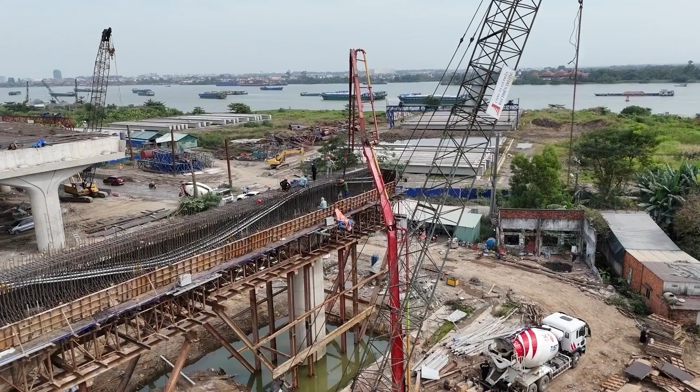Imagine cutting your project schedule by 17%. Imagine generating hundreds of optimized site plans in the time it takes to pour a cup of coffee. Or having an AI instantly identify every structural risk in a 200-page geotechnical report. This isn't science fiction. This is civil engineering in 2026.

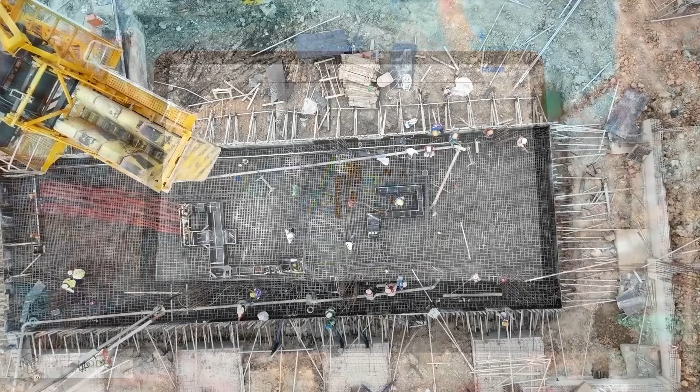Civil engineering is one of the oldest professions in the world. But the way we design, build, and manage infrastructure is changing forever. If you're still doing manual calculations, relying solely on traditional CAD workflows, or spending hours on documentation, you're already falling behind. Today, we're looking at the 4 AI tools that are redefining civil engineering. These aren't just cool gadgets, they are the new industry standard.

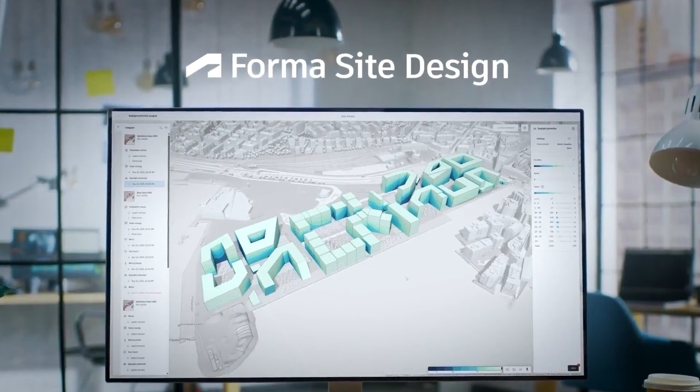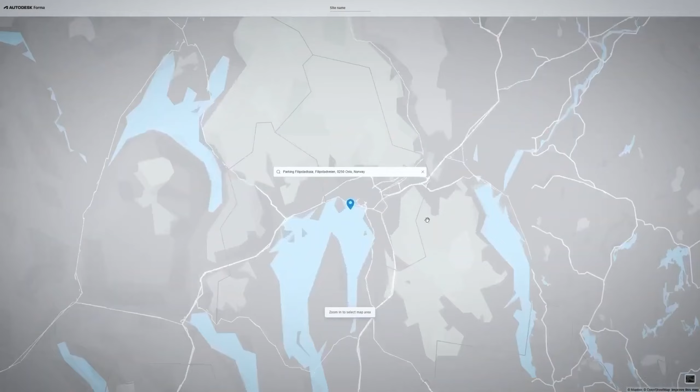Let's dive in. First on our list is Autodesk Forma. Formerly known as SpaceMaker, this AI-powered tool is an absolute game-changer for site planning and early-stage design. In the past, gathering site context and running initial feasibility studies could take weeks. Forma changes that by instantly pulling in real-world data to build a 3D context model of your site in minutes. But where it truly shines is its predictive analytics.

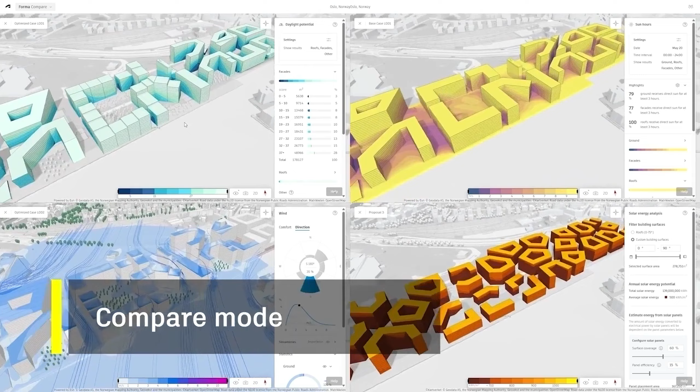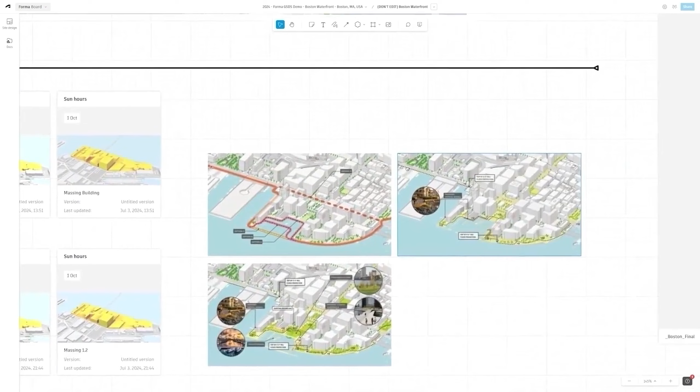Instead of waiting for specialized consultants, Forma uses AI to simulate wind patterns, sun exposure, daylight potential, and noise impact in real time. It allows engineers and architects to test hundreds of design iterations simultaneously. You can compare different massing options side by side, ensuring every project is optimized for sustainability, livability, and efficiency before the first stone is even laid. If you're in urban planning or large-scale development, this is your new best friend.

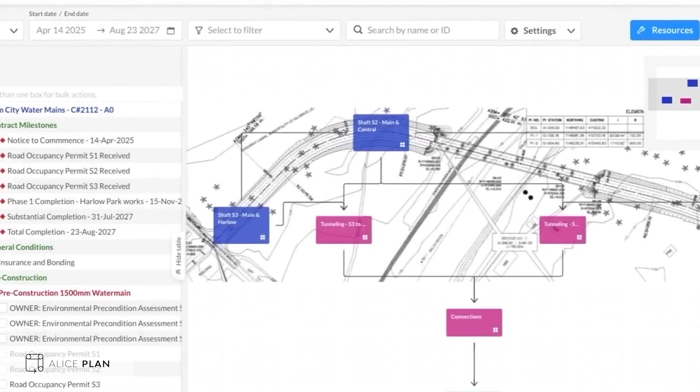Next up is Alice Technologies. We all know that construction scheduling is a nightmare. Traditional Gantt charts are static, and one delay can cost millions. Alice is the world's first generative construction platform. It uses AI to analyze your project's constraints, like labor availability, equipment limits, and material delivery schedules. You input your 3D model and your rules, and Alice generates thousands of possible construction schedules. It doesn't just tell you when to build, it tells you the most efficient way to build.

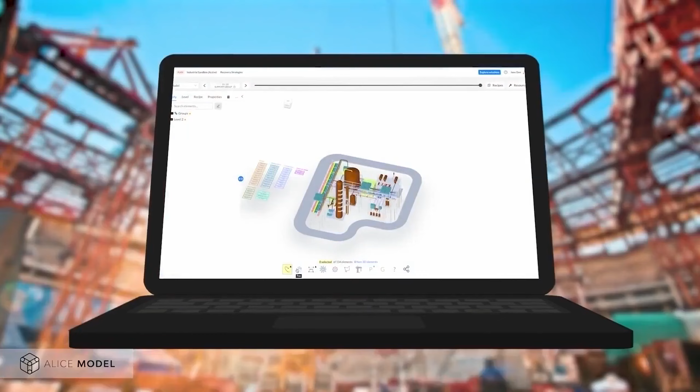What happens if you add a second crane? What if concrete delivery is delayed by a week? Alice instantly recalculates the entire project timeline and cost. You can visually explore these scenarios in 4D, watching the building construct itself on screen based on different schedules. The results speak for themselves. Companies using Alice have reported reducing labor costs by 14%, equipment costs by 12%, and overall project duration by 17%.

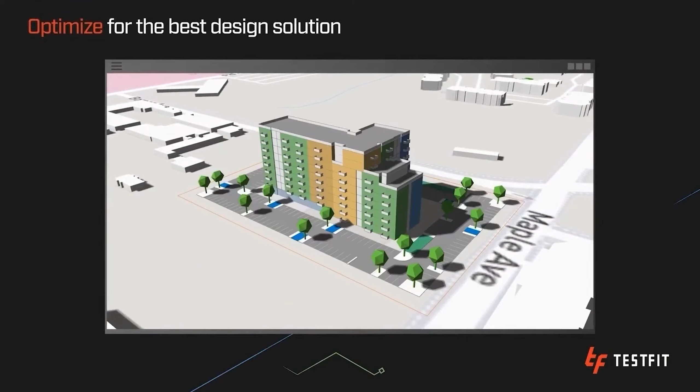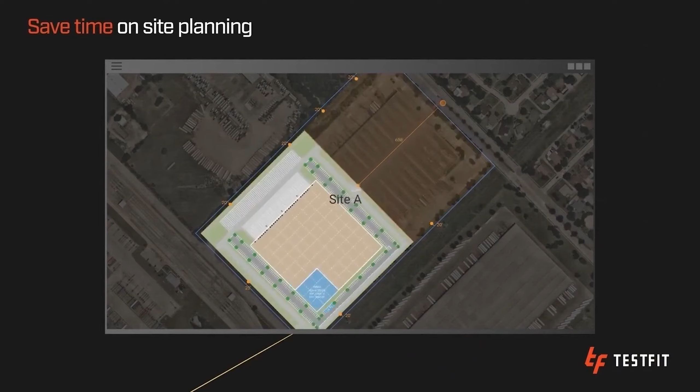If you deal with multifamily residential, commercial, or industrial projects, you need to know about TestFit. This is generative design at its absolute finest. TestFit uses AI to instantly generate building layouts, parking configurations, and unit mixes based on your specific site constraints and local zoning laws. You simply draw a boundary, and the AI fills it with an optimized, code-compliant building. What used to take a team of engineers and architects days of back-and-forth drafting now takes literal seconds.

You can adjust parameters like target parking ratios or unit sizes, and the entire 3D model updates instantly. It's not just about speed. It's about finding the most profitable and feasible use of a piece of land instantly. It bridges the gap between real estate developers and civil engineers, allowing for rapid feasibility studies that reduce risk and maximize potential.

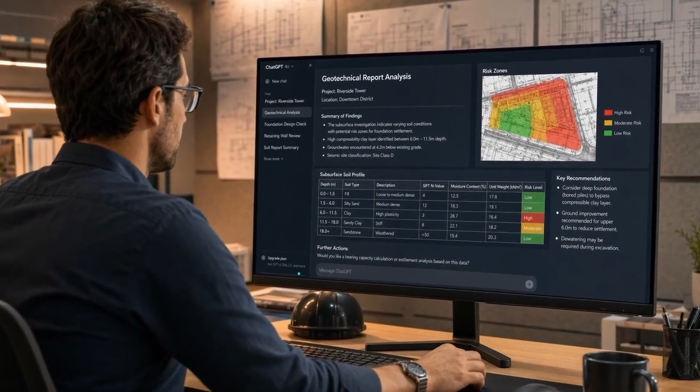Finally, we have the tool everyone knows, but few engineers are using to its full potential: ChatGPT. But I'm not talking about just chatting or writing emails. In 2026, custom engineering GPTs are being trained on specific building codes, local regulations, soil reports, and structural standards. You can now upload a massive, 200-page geotechnical report and ask the AI to identify every high-risk area, summarize the soil-bearing capacities, and flag potential groundwater issues in seconds.

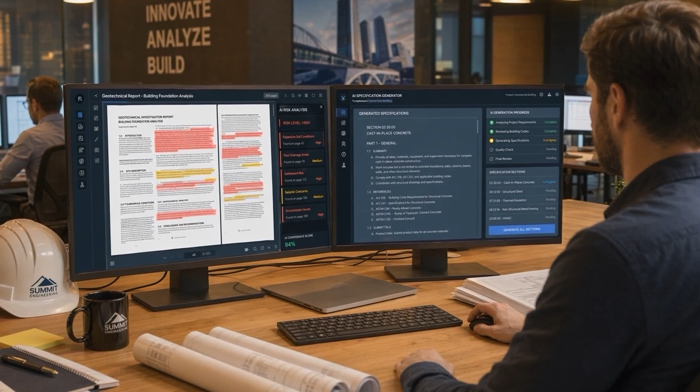Or use it to automate your technical specifications. Instead of copying and pasting from old projects, you can prompt the AI to draft a complete, project-specific concrete specification based on the latest ACI codes. It's also revolutionizing construction administration. When an RFI comes in from the field, the AI can instantly cross-reference the question against the entire project manual and drawing set to draft a highly accurate response for your review. It's the ultimate force multiplier for your daily documentation.

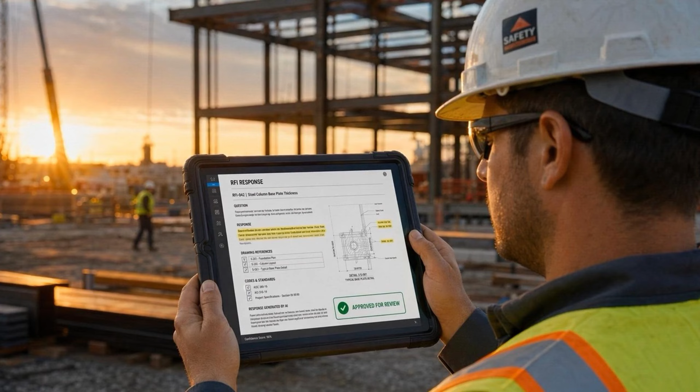So, which tool should you focus on? If you're in early-stage urban planning and environmental design, Autodesk Forma is essential. For construction managers and general contractors looking to optimize schedules, Alice Technologies is the clear winner. If you're doing site feasibility and layout generation, TestFit will save you countless hours. And for every engineer dealing with heavy documentation, codes, and reports, mastering custom GPTs is no longer optional.

The future of civil engineering isn't about AI replacing engineers. It's about engineers who use AI replacing those who don't. The tools are here. The only question is how quickly you'll adapt.